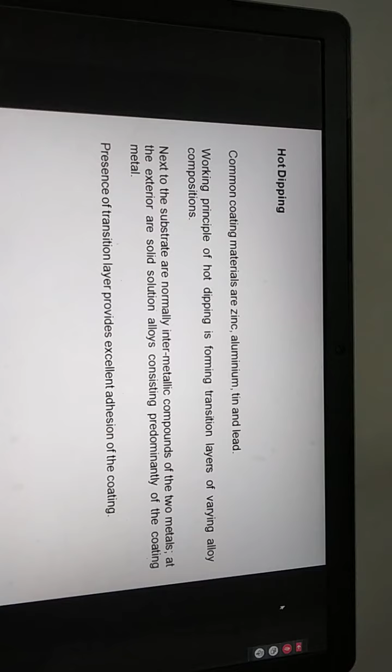Yes sir, okay. So the coating material may be zinc, aluminium, because you need low melting material here, low melting point material. So zinc, aluminium, these are having very low melting point, and your substrate, that is base material, it will not be melted at that temperature.

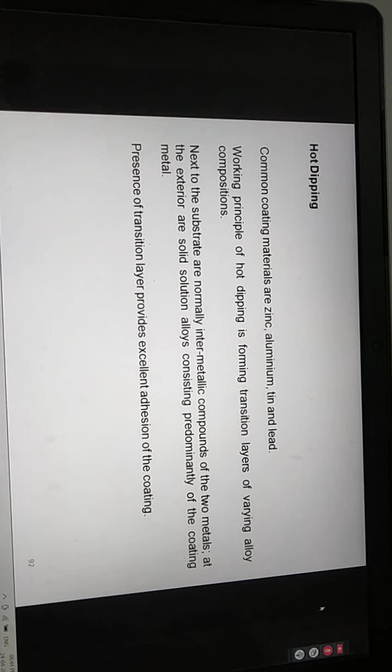I hope all are getting it. So in next 5 or 10 minutes we will stop here. After...

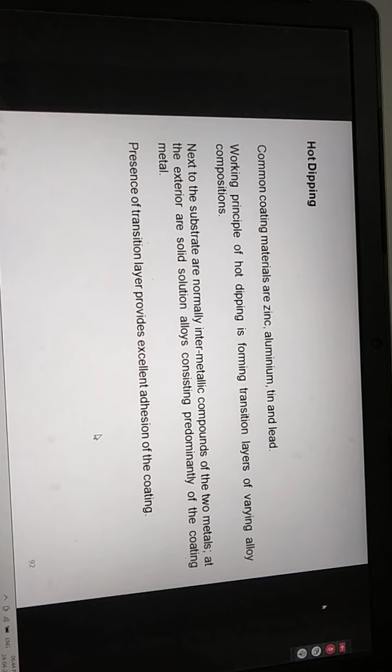So you can see the application. Now metal spraying, metal spraying. Again, now here there are many modifications in this, as per the requirement. So metal spraying, let me show you. I am sure you might have seen some of such methods. Quickly let us see.

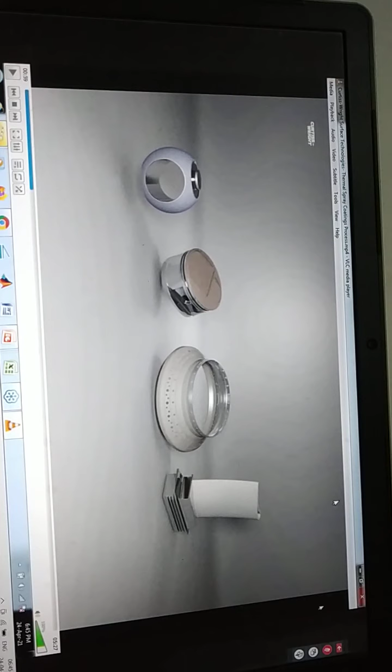Is it visible, that video? Yes sir, yes sir, okay.

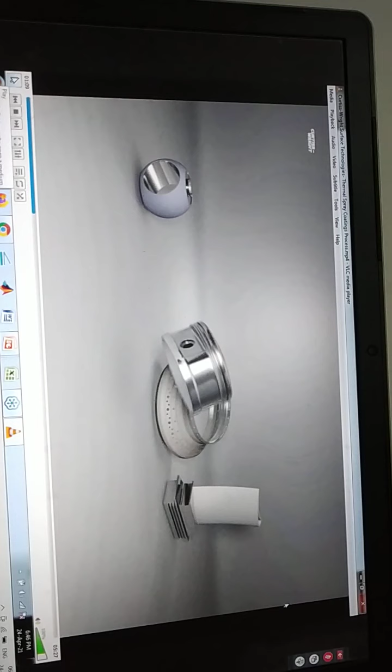So you can see different engineering products are shown here, on which the coating will be deposited by metal spray. You can see the spray coating.

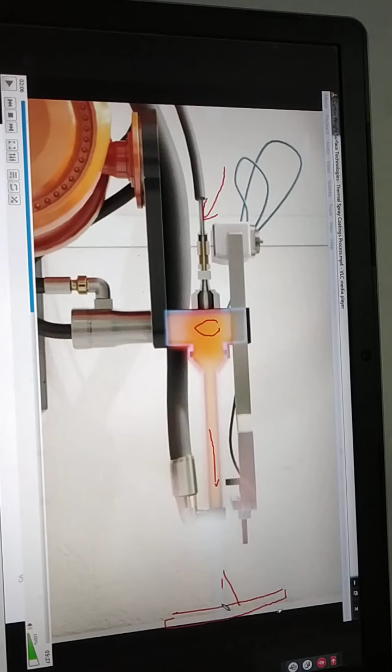So here this is your raw material. In the wire form it will come here, and then inside it will be melted. The raw material, that is your coating material, it will be melted here, and then in the liquid form it will come out and it will be sprayed. It will be sprayed on and it will be deposited. So here whatever your plate is there, on that it will be deposited. Okay, and then you will be getting your required coating.

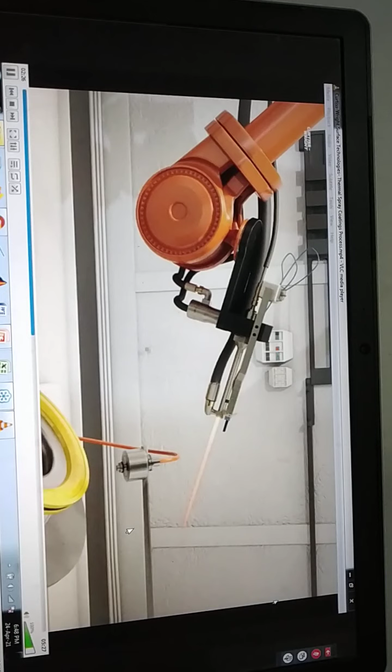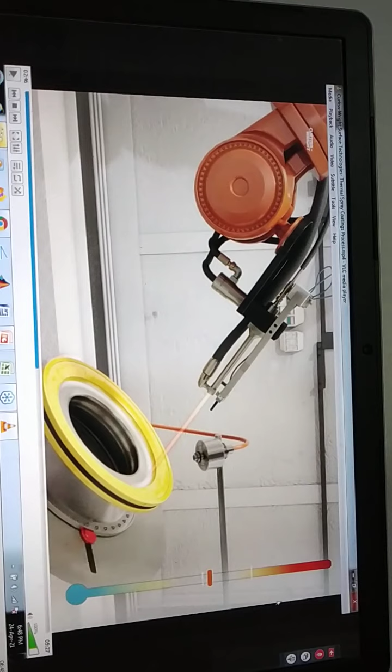So here you can observe the workpiece is rotated. Workpiece is rotated so that you can get the coating deposited on the entire product.

So you can see internally what happens there now. Okay, the surface, base metal, it should have some rough texture so that the bonding will take place. So how that rough texture is obtained, that we will discuss later on.

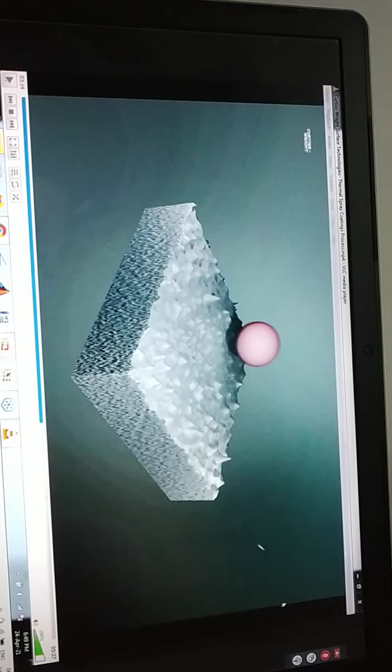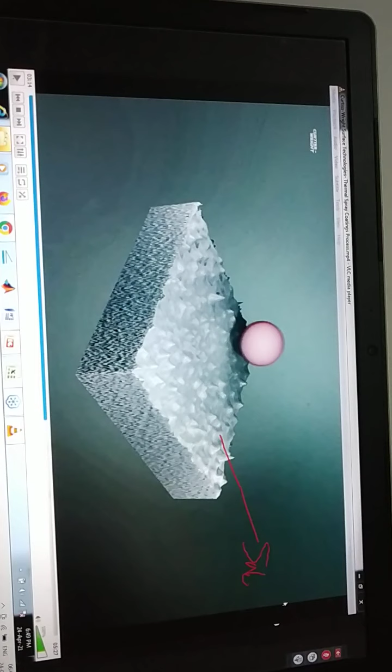So here, this is your substrate, okay, at the micro level, and you can see the irregular surface finish. That is essential. Otherwise, if it is having good surface finish, what will happen? The coating material will not stick with... yes okay, bonding. Instead of 'stick' we will use the word bonding, Palendra. So bonding will not take place and the interface will not be having good bonding.

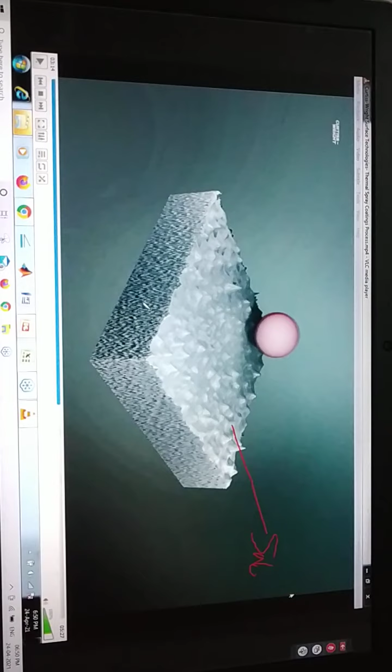So how this irregular surface finish will be obtained, there is a separate process for that. We will see that process before spraying of the material. Before spraying of the material, we achieve some rough texture. Even at home you can see, there is a wall - before applying the paint, a sand paper is used on it, sand paper is used. You might have seen, Palendra, that sand paper is used to roughen the wall and then the paint is applied. So the purpose is that then the bonding will be increased.

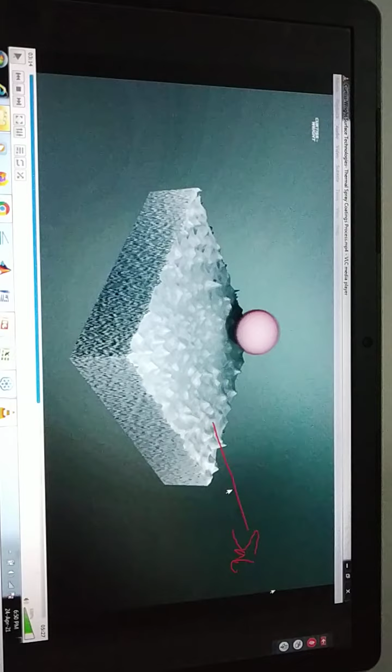As the molten or semi-molten particles impact with the substrate surface, they begin to cool and contract, forming a strong mechanical bond with the substrate. The coating is built up in layers until the required thickness is reached. You can see at the micro level, okay, through various microscopes, it can be observed under the microscope also.